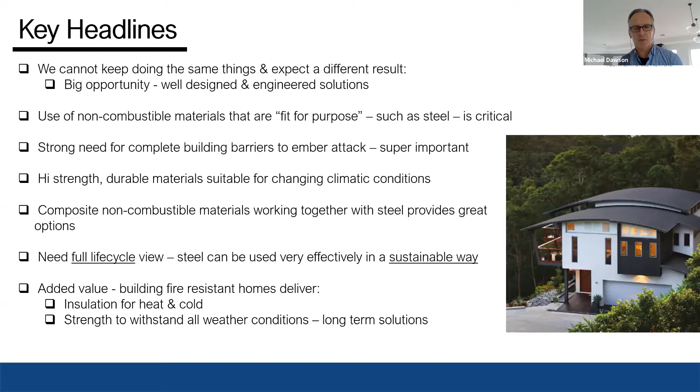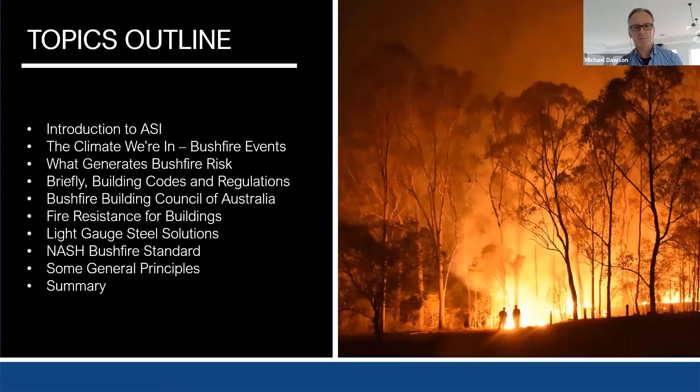I'll move us on to give a quick outline of the topics. I'll talk a little bit about the ASI briefly. We'll touch on the climate we've found ourselves in at this time in history and what's generating bushfire risk. We're going to talk a little bit about the building codes and regulations, and Ian also has strong expertise in this area that we'll add to the discussion. We'll move on to touch on fire resistance in buildings and spend quite a bit of time discussing light gauge steel solutions and the NASH Bushfire Standard before we finish up with some general principles and open it up for questions.

So a little bit about the ASI. We are the Peak Steel Industry Association, and we're quite proud to say that during this COVID period, we have had an increase in membership, which has been great.

Something that would be of interest to the audience is that we've got a strong focus on quality and compliance systems, particularly with the National Structural Steelwork Compliance Scheme and AS 5131, which is the new standard for steelwork fabrication and erection. We see that as important because Australia was one of the only countries that didn't have a standard for steelwork fabrication and erection until now.

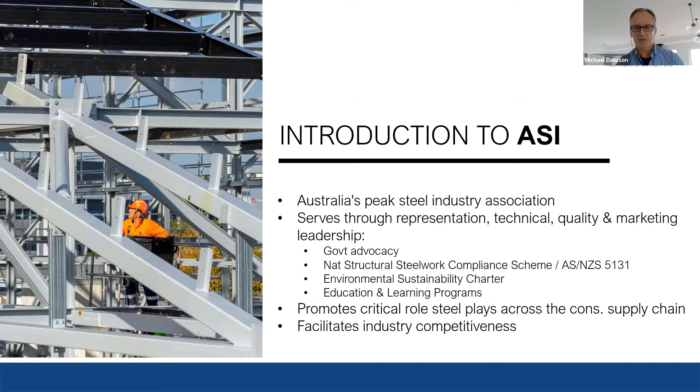We have a sustainability charter for our members, and we put a lot of work into education and learning programs for our members.

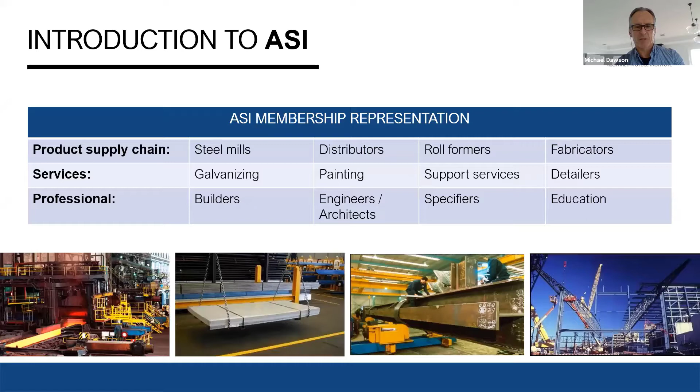Just to give you a cross section of our membership, as you can see there, it does cover the complete construction supply chain. We do have some architects that are members, but we cover the full gamut from steel manufacturing to distribution. We have a lot of members who are downstream manufacturers and roll formers through to the service end, and of course professionals in engineers and architects.

We've found in this era too, just to finish up on talking about a background on the ASI, that certainly online learning, e-learning as we have on our website, and access to technical information is becoming really important, and short courses as well.

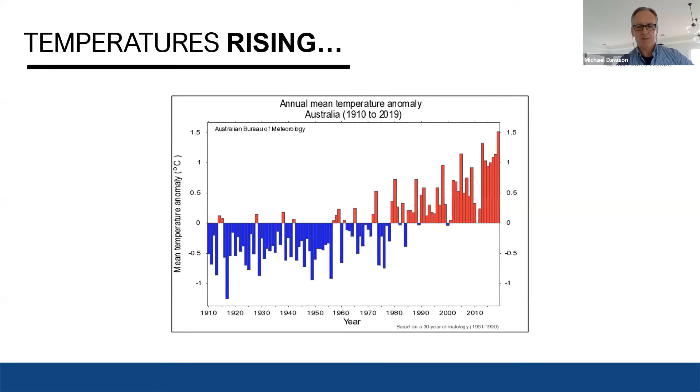So just in terms of a lead into where we find ourselves, as we all know, the climate is changing, and it is warming, and it is having impact on our environment and the built environment as well. It's important to understand that this is an issue that's not going to go away, as I'm sure we're all well aware.

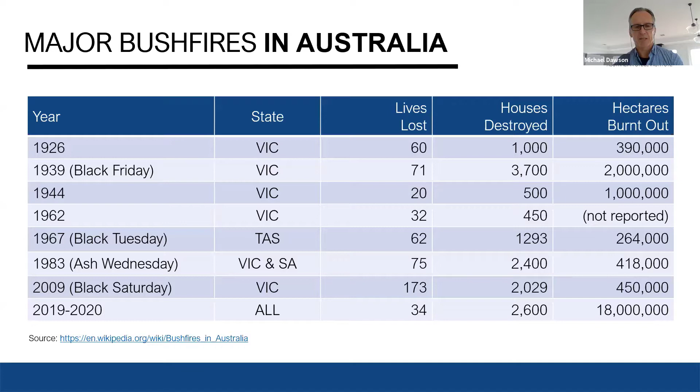If we consider the history of major bushfire events, I've just got a summary here, and as you can see, sadly, lots of lives have been lost in bushfires, and many homes have been destroyed, particularly in the terrible bushfires of last summer. But certainly what we're seeing is very large areas of land that are getting burnt out as well.

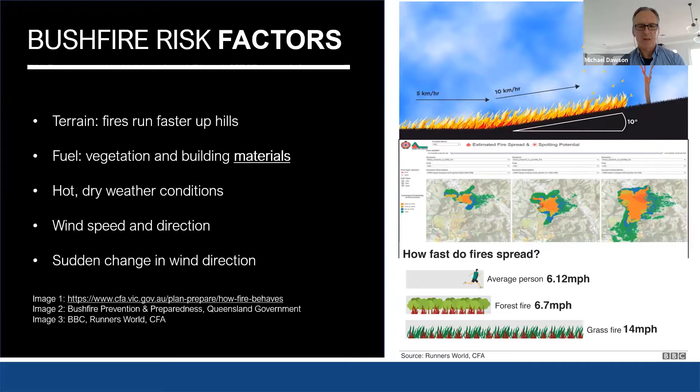We'll just talk a little bit about the risk factors, and some of this won't be new information to you, but it's really important to consider the vegetation and the building materials around the site, and obviously the combustibility of those materials is really a strong risk factor. Interestingly, fire runs quickly up hills, and as we saw last summer, it does spread very, very quickly, and the ember attack, the spread of embers across a fire region, is a really significant risk and issue as well.

So just in terms of how buildings burn, and Ian would probably have some comments on this, the key issue, the major cause of building damage, is ember attack. It's understood to be around that 90% level where the major cause is embers that are causing the building to eventually get damaged and ignite as well. Ian, would you have some comments on that?

Yes, so it's been known to be around 90% for quite a few years now. I recall that percentage at the time of Black Saturday, and it seems to be the same statistic for Black Summer.

So we also know that around 90% of houses are lost within 100 metres of bushland, which is not surprising really when we think we're talking about bushfire. So what is happening when we've got 90% being lost from ember attack of houses, but most of those houses actually being close to bush?

What we have to visualise is the ember attack igniting whatever is combustible, both in the immediate landscape around the house, i.e. bush and leaf litter and wood chips, for example, and mulch. But also, of course, the combustible elements of buildings themselves, whether they be window sills or the interior aspects behind the outside cladding - the structural wall framing, the timbers in the roof space, and so on.

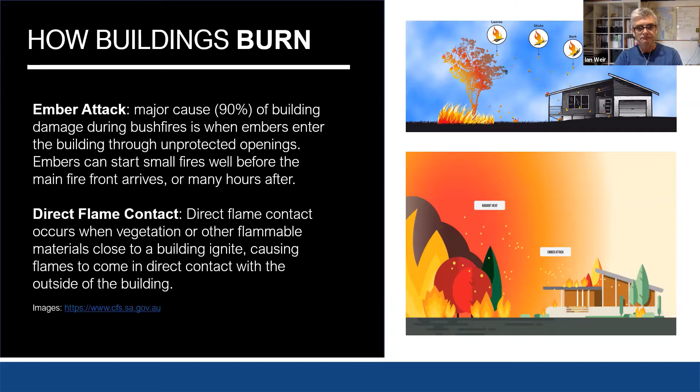Okay, so we'll just move along and talk a little bit about building codes and regulations. As it will be well known to all of you, the National Construction Code Volume 2 is a key reference which mandates the safety of building occupants via two approaches: the performance solution, which we'd like to talk a little bit about today, and also the deemed to satisfy option as well.

So there are two deemed to satisfy methods complying with the NCC. One is the NASH standard, which we will talk about at a little bit of length shortly, and of course the other one is AS 3959, of which Ian is a co-author.

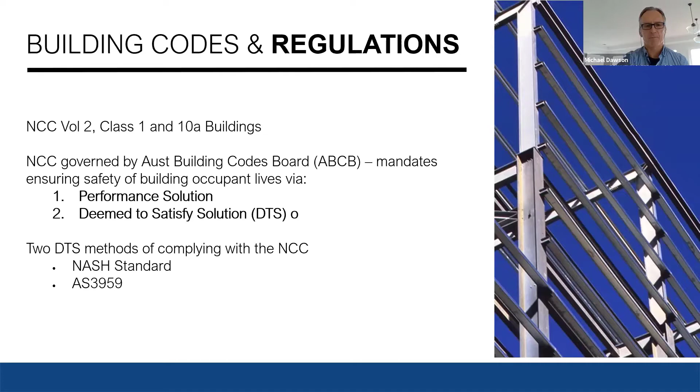Yes, it's quite understandable that for many of you in the audience, you might assume that AS 3959 is the pathway for certification of compliance. AS 3959 does have some history in this space, so it's kind of a brand, but it's not the only way of meeting the requirements of the National Construction Code.

The AS 3959 is actually in two parts. The first part is the bushfire attack level assessment methodology, and the second part are the construction levels to meet those BAL levels.

What we've found is that in various state governments, particularly New South Wales, they've written planning for bushfire protection, and that document now has the bushfire attack level assessment embedded within it. So I guess the main point here is that AS 3959 is not the only pathway for compliance. It works on a particular paradigm - we'll talk about that a little later.

NASH Standard works on a different one, but please be mindful that there's the performance statement. So Michael, perhaps if you just discuss that and I might fill in some more. Sure.

I've highlighted there a reference, and I should point out that with this presentation, which we'll provide, we'll also provide all of the references at the end of the document. As you can see on the screen there, there is a bushfire verification handbook put out under the National Construction Code by the ABCB, and there are some good references for these performance solutions around designing the building for ember and radiant heat attack, and assessing the performance approvals. So we've put that up there as a reference. Ian might have a couple of points to add to that.

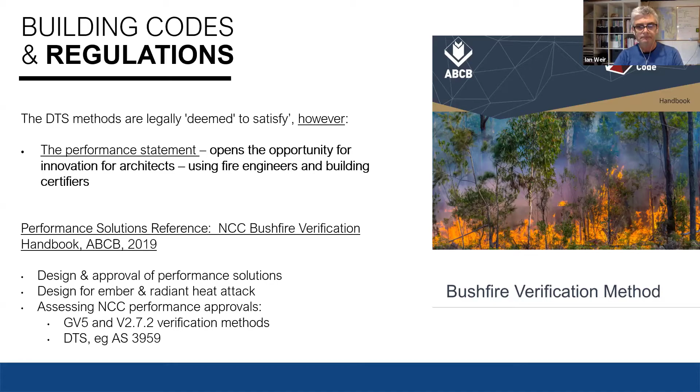Thanks, Ian. So that brings us to state governments and their controls, which are predominantly around setting up the bushfire-prone areas, as most of you would know, which have some subtle differences across the country. But a key point here is that the state government legislation is still underpinned by the National Construction Code performance requirement, which we've listed there, and also AS 3959.

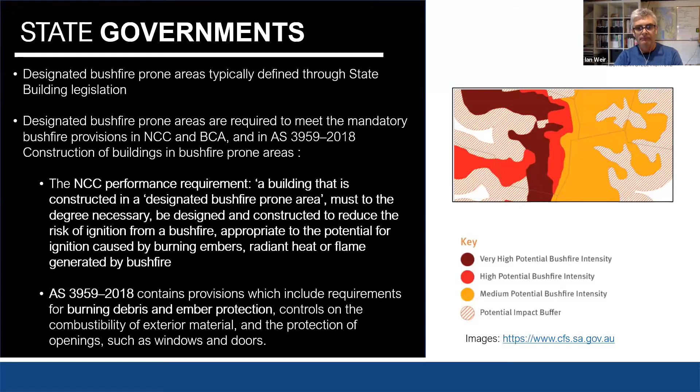So Ian, I'm not sure if there's a couple other points you might want to add. Just on the mapping of bushfire prone areas and the relevant buffer areas, that some of you might be familiar with, that is going to be unified into a single methodology. The first state to come online is Queensland. Next will be WA, and then Victoria, and pretty soon all states where bushfire building is relevant will have a unified mapping methodology and style.

So that leads us on to some information. I thought it'd be very relevant for us to have a small section here on the Bushfire Building Council of Australia. Urge you, if you haven't already, to have a look on the website at what they do. But of great interest is that they are developing a 5-star bushfire resilience rating system, which will be designed for established homes and also for new homes.

And the rating system looks at the likelihood of ignition. And I'll let Ian perhaps add a few points, because Ian works quite closely with the Bushfire Building Council of Australia. Yeah, just briefly, the Bushfire Building Council of Australia was started about, I think, 7 years ago.

And it consists of members such as Craig Lapsley, the first and last Fire Commissioner in Victoria, fire engineers, an architect in myself, and other bushfire risk experts and firefighters. It's a not-for-profit organisation, and together we've spent collectively many, many years on committees, such as the one for AS 3959. So we're right across the gaps in the regulatory framework in Australia, in most states.

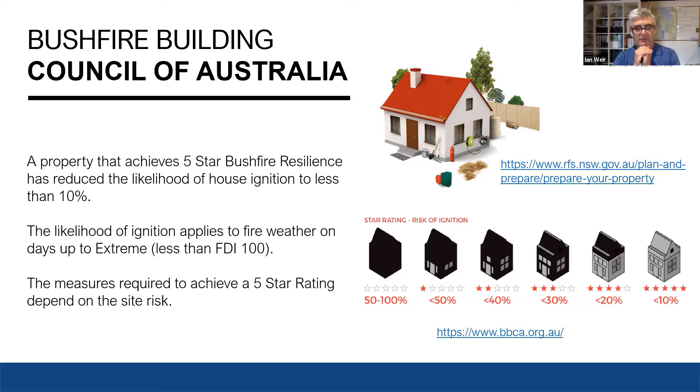Yes, so one thing, for those of you that are familiar with AS 3959, particularly building to flame zone, you might have noticed the reference in that standard to other AS standards, particularly 1530 Part 8.1 and Part 8.2. These other standards I mentioned are actually laboratory testing methodologies, and none of the laboratory testing methodologies that we have in our regulatory framework actually test for ember attack.

So that's just to indicate that we've got 90% of building loss from ember attack, but we have nothing within our current standards and regulations that actually responds directly to any kind of scientific knowledge we might have on what embers are actually doing. So the BBCA is advocating for other forms of testing to acknowledge that high percentage of loss.

We view that building in bushfire-prone areas, even up to BAL flame zone, is actually a relatively easy exercise. Should be much easier than it is now. And the first principle is non-combustibility, using non-combustible materials, whether they be masonry or steel, fit for purpose. We see that this is an aesthetic issue, not just a scientific problem, that we need architects to deal with.

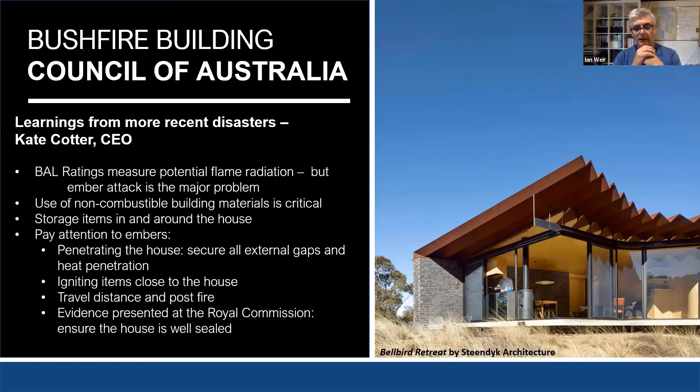So we're presenting a couple of examples here. We had the Steendyk house there just before, which is a wonderful house. This is a house myself and Kylie designed for a professional firefighter in Western Australia.

There's nothing super high tech about this house, designed for BAL 40, entirely non-combustible. The glazing is all protected by lightweight stainless steel mesh, which protects it slightly from ember attack and projectiles, but also a bit of radiant heat. If the windows are left open, then of course you've got that protection from embers. So just designing for robustness, resilience, and non-combustibility. And it's kind of not that difficult.

The difficult bit is actually integrating everything elegantly so that people aren't spending a lot of money just on the bushfire features. So having the shutters, for example, doing something much more than just working once in a lifetime or once in a bushfire event, but providing shade and insect control and so on.

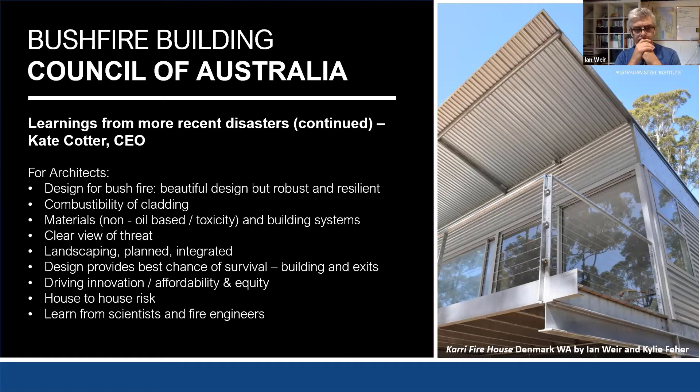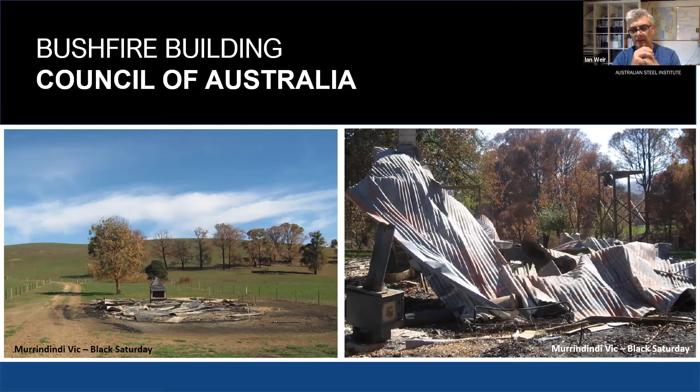So this image on the right is to encourage you to think twice when you're fed the very provocative images that we get during and after major bushfire events.

Just the last slide here, just to acknowledge some really important precedents. Glenn Murcutt's house in the Blue Mountains, the Simpson Lee house, been in 3 fires, was affected by Black Summer. The deck was actually singed a bit. It's a hardwood, I think, Class 1 durability timber boardwalk there that enters into the house, that was singed a bit. I've had a chat to Glenn about the house. It performed beautifully as it did in the other 2 fires.

The Montecito residence, Montecito area, Montecito Canyon, you may have heard of that in the news. It's been in 2 major fires in California. Really extraordinary house by Tom Kundig here, and a wonderful quote where he's recorded as saying he wanted to build a house that didn't contribute to the fire front.

And in my mind, that is exactly the kind of paradigm that we need to be addressing adaptation in bushfire-prone areas, understanding that bushfire does not discriminate between buildings and bush. When the fire danger index goes up, so too does the ignitability, the likelihood of ignition of timber, because timber is timber, whether it's in the bush or in the landscape or in the building, and its propensity for ignition goes up as the fire danger index heads up and goes through severe into extreme and then into catastrophic. Your timber decking will increase in its likelihood of ignition as the FDI goes up.

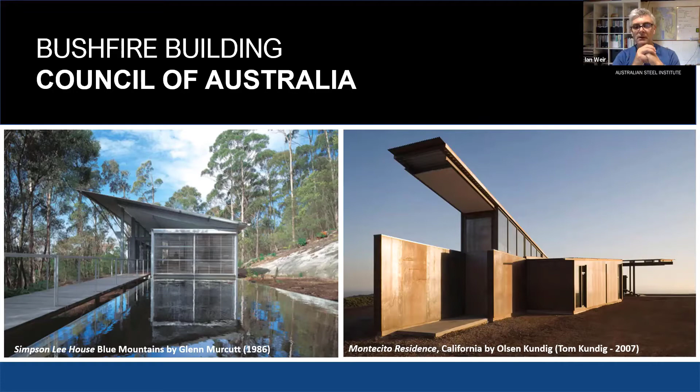So we'll just touch on a few key points on fire resistance for buildings, and this is where steel does have an important role to play. As you would know, it takes a lot of heat for any impact on steel in terms of its integrity and its performance as a structural component of a building. Bushfires do have a lot of heat, but they do move through quickly, just in seconds and minutes.

So one of the keys is to really use non-combustible products to build in a passive system, so layers of resistance, if you like, to prevent the fire from getting to peak temperature. And as Ian said, the key is to prevent ignition of the building. So steel does play an excellent role in that. There's a chart there that shows you in terms of the type of heat that's needed before the structural integrity starts to get impacted.

One of the critical points out of this slide is really building in passive protection, using at the start an outer shell that protects not only the outside of the building, but also fire getting towards the inside of the building as well.

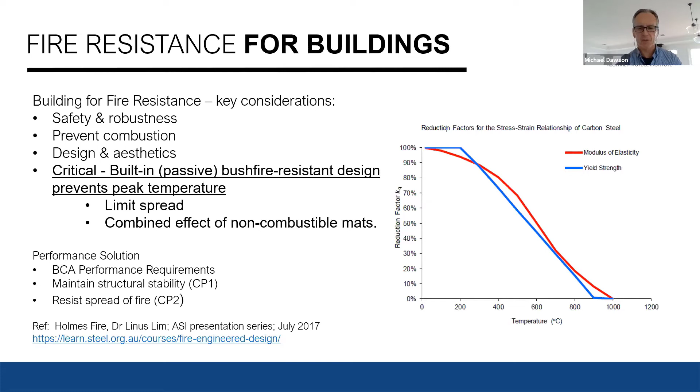This shot shows quite a ferocious fire that's underway, which obviously there's ignition outside the building, and there's obviously materials inside the building that have ignited. But as you can see, adjacent to that, there's a building that at that point in the fire is not impacted.

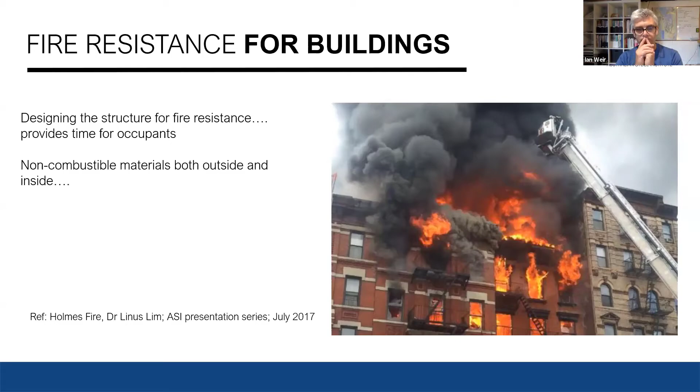Thanks, Ian. So that takes us on to light gauge steel solutions. We're just going to talk a little bit about the products that are available and lead into the NASH bushfire standard. So with light gauge steel, as many of you would be aware, there's a range of options.

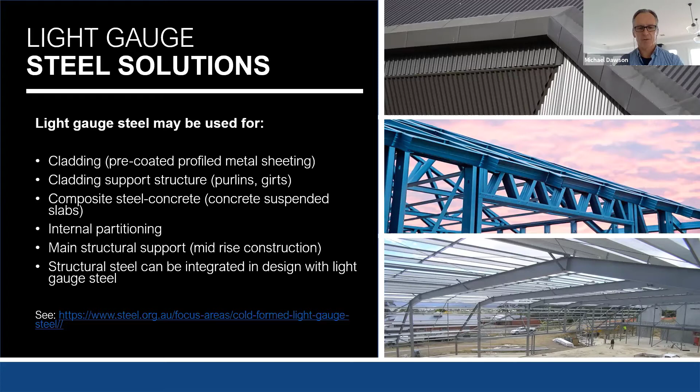Multi-use capability of steel products for various design elements in the building: cladding, purlins and girts, steel working with concrete, internal partitioning, and so on. I think one of the key points here is that light gauge steel also works very effectively with heavy steel as well. So if there needs to be an extra load bearing component in there, that mix and match of the various steel structures or products works really well.

Just touching quickly on another standard, AS NZS 4600 for cold form steel. For those that don't know, the design methodology in steel buildings for cold form sections is based on these members being protected by fire resistant barriers. And that's the extra layers Ian's talking about, due to the fact that there's a high exposed surface area to mass ratio.

And there's an image there of a BlueScope TRUECORE frame as well.

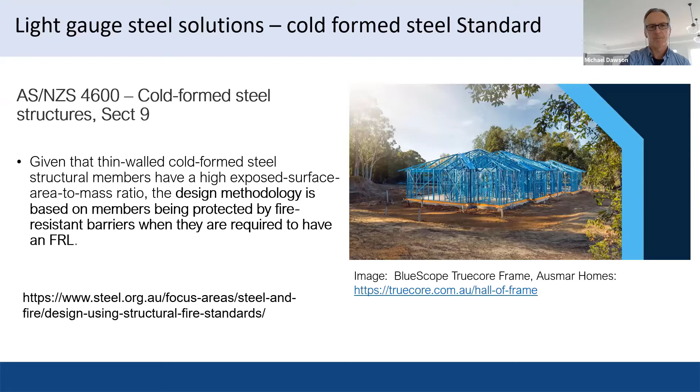So moving on to the NASH bushfire standard. We'll just talk for a few minutes about this standard before we wrap up with some summary. As you can see, the image there is the full-scale test by CSIRO in Mogo, New South Wales, which has been used for the NASH standard.

After that test, the internal framing was still in working condition. So the standard itself has been developed to meet the performance requirements of the National Construction Code. Obviously we're talking about non-combustible construction, and it's referenced alongside AS 3959 as well. It's a DTS solution, and it covers steel frame houses with steel roof cladding and non-combustible walling.

So that test uses propane gas, which is actually slightly hotter than bushfires, and is a full flame immersion test. So if your innovative design passes that test, a lot of the systems don't need to pass the other tests. It's a full simulated bushfire attack, three-dimensional, on all sides of the building.

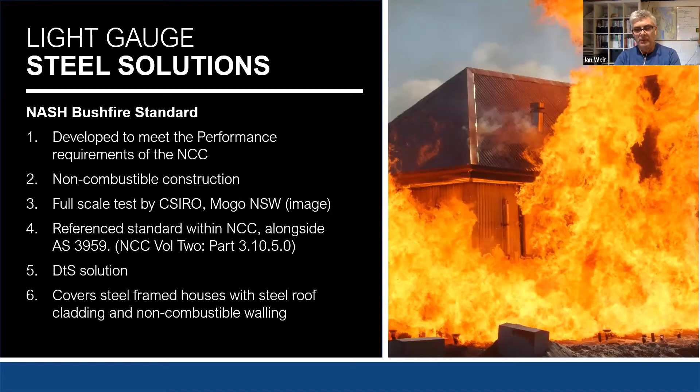NASH, for example, says you can't have platforms in your roof space because it's actually saying that roof space needs to be kept non-combustible and to not encourage people to store cardboard boxes and so on, which is really common and a real major contributor to house loss.

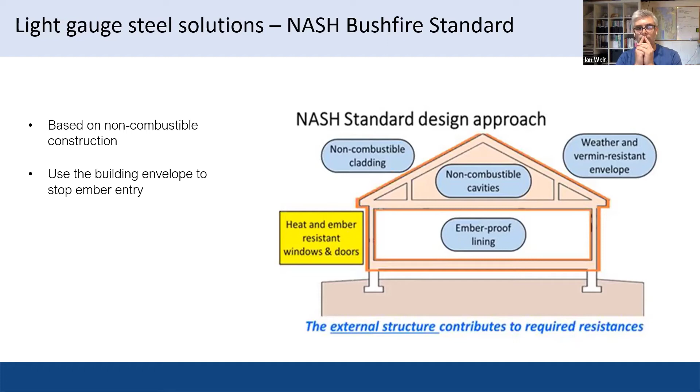Thanks, Ian. So the NASH bushfire standard, there are two solutions which I identified there for BAL 12.5 to BAL 40 and the BAL FZ, and windows and doors to AS3959. As we said, it's referenced in the National Construction Code as a DTS solution and has been since 2015.

I guess a key point also, as many of you would be aware, is that steel house frames are built using standard building practices and standard materials.

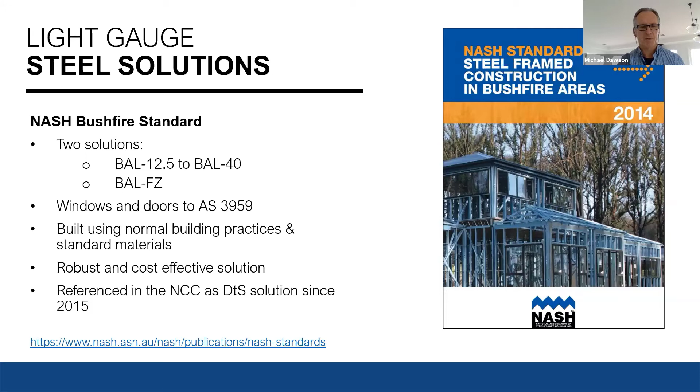And while I haven't done the cost comparison, I would have thought it's significantly cheaper to build to the NASH standard compliance with flame zone. That is, of course, if you're building this typology of house, which is kind of your traditional typology.

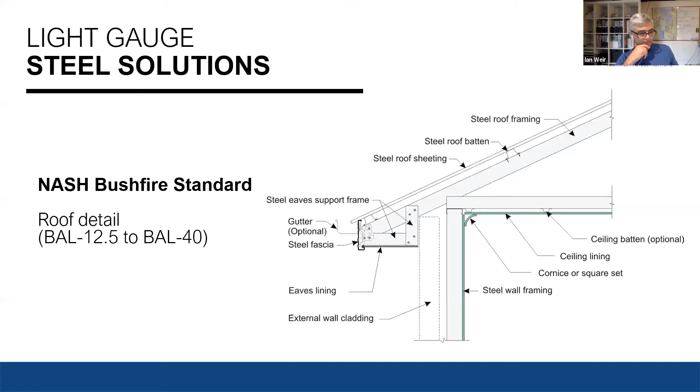Thanks, Ian. So just on the horizon, we thought we should mention there are several proposed changes that are expected to be referenced in the 2022 updates for the National Construction Code. That is, storage platforms and ceilings won't be allowed for the reasons that we've talked about.

Give solutions for tiled roofing for BAL 12.5 to BAL 40. Extended roof pitches and extended solutions to cover cathedral ceilings. It also covers roof skylights and windows, and clarifies the requirements for air conditioning and service ducting.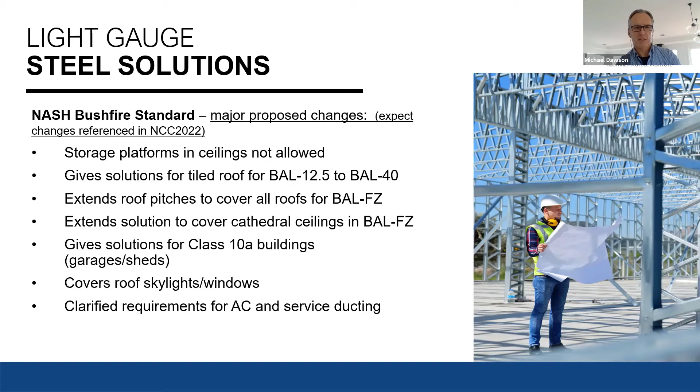So we're getting towards the end of the presentation. We'd like to just perhaps talk for a couple of minutes and wrap up on a few of the key themes that we've been talking about to date.

So the key principle is that for bushfire resistance, non-combustible materials and using layers of defence in the building structure with non-combustible materials is really important, and steel can play a really effective role in that. We've mentioned that the ember attack issue is critical to form that defence, as approximately 90% of buildings are damaged because of ember attack.

The architect's role is super critical in the design, of course, and creating opportunities to use, as Ian was talking about, fire engineered performance solutions. So thinking about other opportunities that can take us further on this journey to build structures that are fire resistant.

Steel building products have a long life cycle, as we know. And I think a point that I'd like to raise is that steel can be really used in a sustainable way. Steel, as I said, has a long life. Steel is preeminently recyclable, and it can be reused. And of course, in the manufacturing of steel, it has recycled content that goes into its manufacture. But a key thing is that it's non-combustible, and it does add to that long life approach.

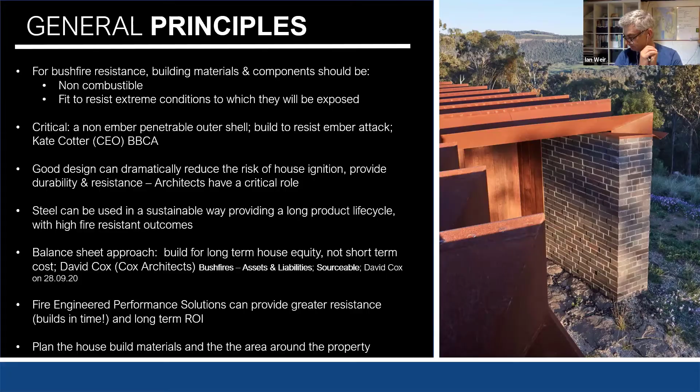Thanks, Ian. Just getting towards the end of the presentation now, and I think I've probably covered these points, but obviously steel is an excellent material to consider for the design of bushfire-resistant buildings. I've mentioned all of those points, but perhaps a couple I haven't: design flexibility. Obviously with architects, it's critical that the creativity and the opportunity to look at different designs is brought into play, and steel does play a very good role in providing that opportunity.

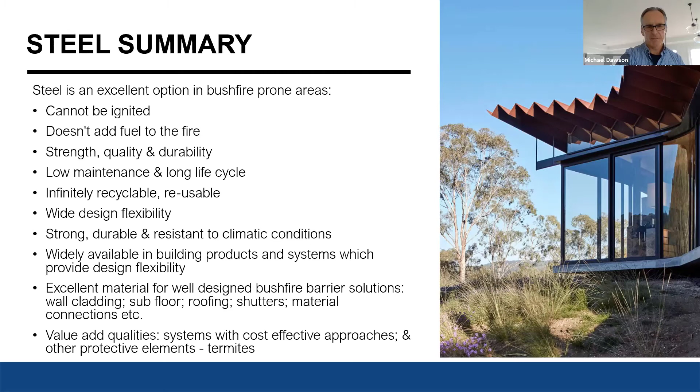A lot of the other points I've mentioned: it's non-combustible, it doesn't add fuel to the fire, and it's obviously a very strong and durable material. And the other points I think I've mentioned.

So just to wrap up, I thought a couple of good quotes here from people that you may know. Ken Watson from NASH—Ian and I like this one: 'Homes in bushfire-prone areas which resist ignition, add no fuel to fire, remain strong and secure in all conditions, represent better value for owners and the community as well.' And one from David Cox: 'Steel and other non-combustible composite materials working together'—so looking at that different mix and the alternatives provide an excellent fire-resistant solution.

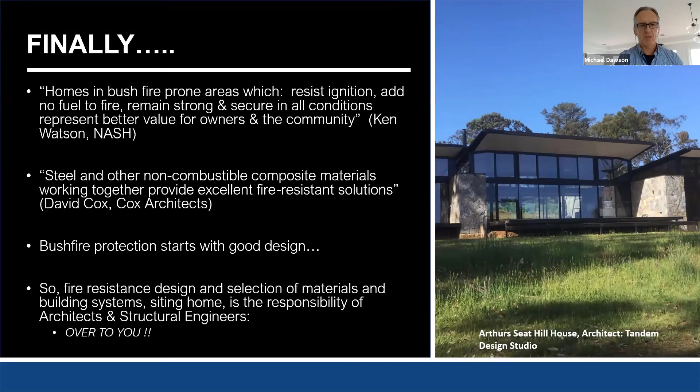Bushfire protection does start with good design and a selection of materials and building systems. So we hope that you've got a little bit out of this presentation today that's of value.